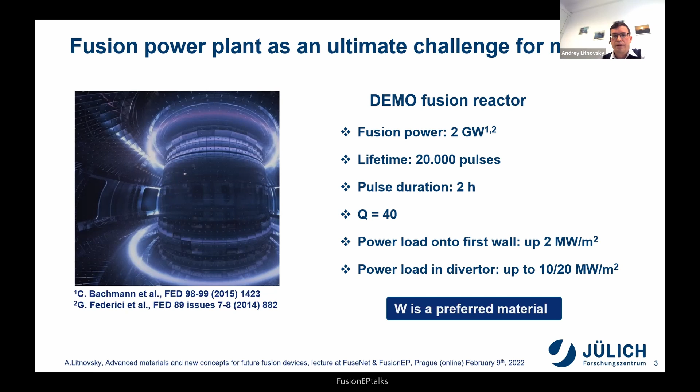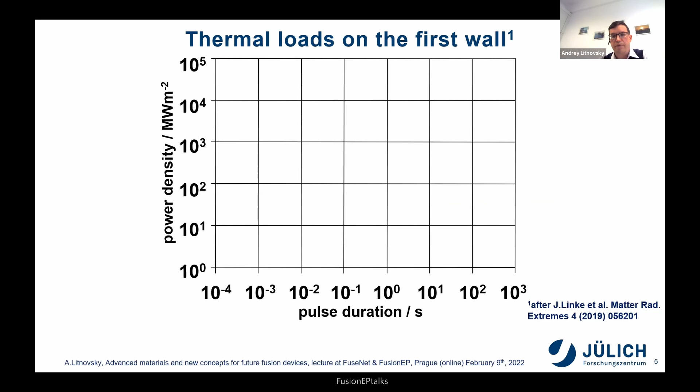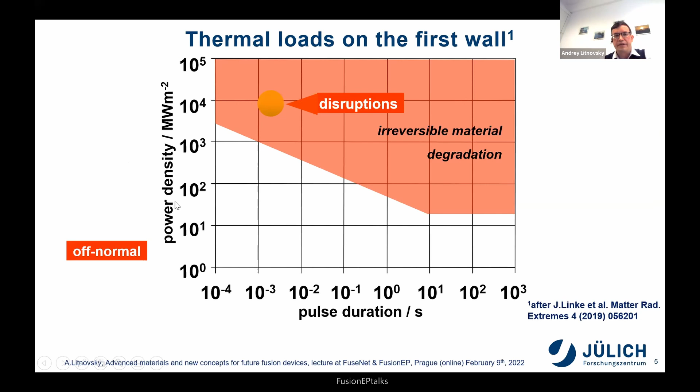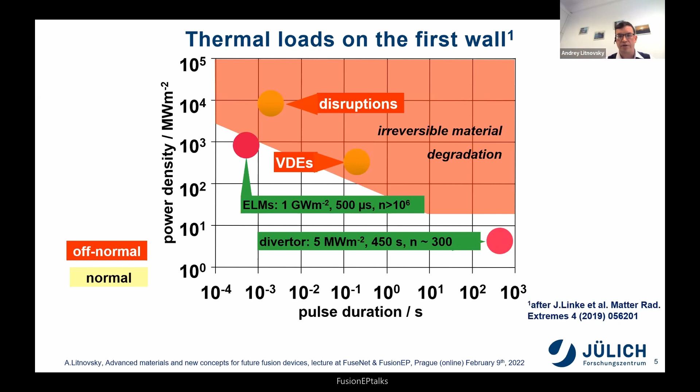If we look to the conditions awaiting our materials in the fusion plasma, we can see this area of irreversible material degradation. This is where we really lose the material - this is the power density, and this is the duration of the pulse. So we can tolerate disruptions and vertical displacement events for a very short time only. But even if we look at the long pulse duration, remembering we will have pulses of 2 hours in the power plant, we can see already that the tolerable loads, the power densities, become really quite small for the material to withstand. So time plays against the material lifetime, meaning that in the fusion power plant, in the reactor, already regular operation becomes challenging.

From current tokamaks, and I actually work in almost all the largest tokamaks, we see the performance challenges facing our materials. This can be dust from materials, plasma disruptions, melting of components, or cracking of the materials, which was observed on several devices, shown here and a couple more.

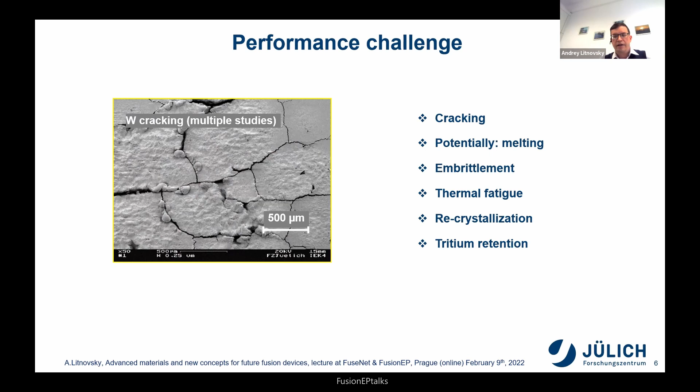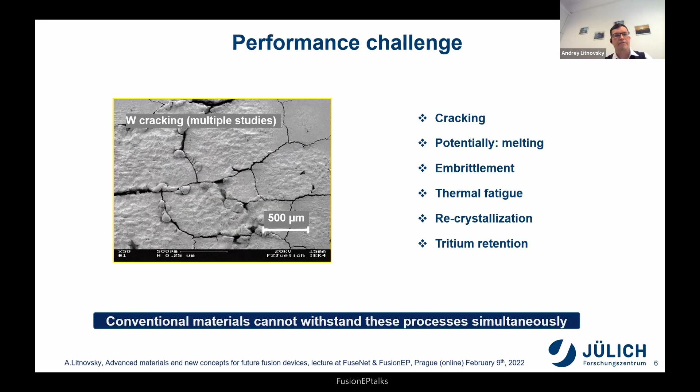But the key difference from current reactors, and even from ITER with its 10-minute pulses, for a power station or power station-like reactor, during discharge almost all of these processes will be changing the material simultaneously. They will happen simultaneously. And presently, there are no materials which can withstand these things simultaneously.

Another characteristic feature of the fusion power plant, which distinguishes it from current fusion devices, is the neutron environment. As we remember, in the nuclear fusion reaction, heavy isotopes of hydrogen, deuterium and tritium, merge to create helium ash, the fusion ash, plus a high energy neutron. So we can see that the materials under this massive neutron impact will transmute, and after 5 years of operation, already 6% of tungsten will transmute to these isotopes.

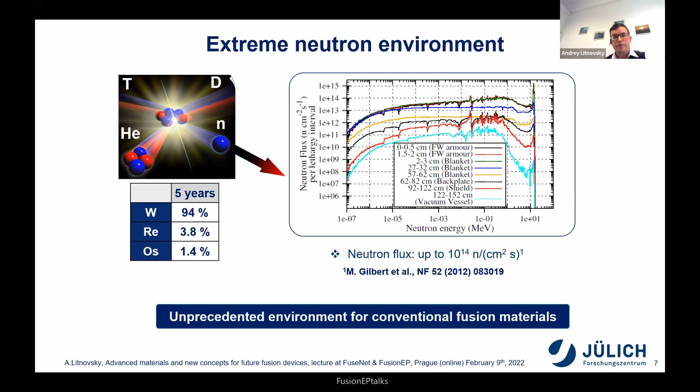Speaking about the neutron flux, here we see the neutron flux density as a function of energy per lethargy interval. For 14 MeV neutrons, the fluxes can be as high as 10 to the 14th neutrons per square centimeter, which is really a great number. This is a really challenging environment which will change the properties - I would say honestly change, because they may influence the material this way or the other. And this is only speaking about the so-called regular operation.

There is also a safety challenge, and of course in the case of a power plant, safety will play a very important role, and it will actually be by far more excessive than the safety requirements for, for instance, ITER. The temporal license of ITER actually took something like 50 meetings to handle and around 1,400 documents. So you can imagine for the first licensing of a power station what we can face.

Under these circumstances, the fusion power plant will face tremendous challenges and additional circumstances which will further complicate operation. First, there's no immediate access to water and coolant, no electricity, difficult logistics, and lack of manpower, which may make it difficult to suppress the release of radioactive materials and dust from the vacuum vessel. So this should, in fact, be avoided.

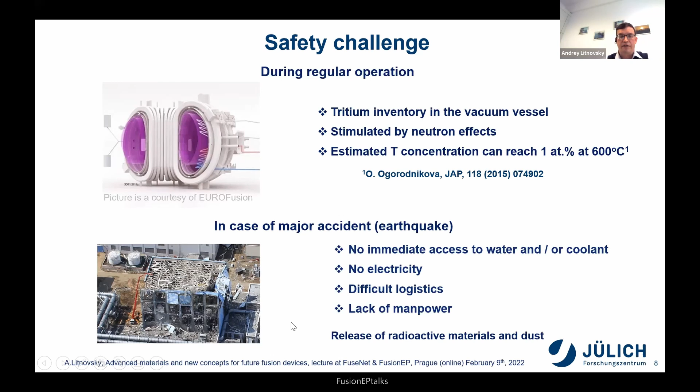So in this case, the new plasma-facing material - and this is the topic of this lecture - to show this concept, it will be the combination of performance, safety, and technology united in each of these materials. In the course of this lecture, I will go from topic to topic to show solutions for this challenge, starting from performance.

Looking at performance, one of the perfect examples is so-called tungsten-fiber-reinforced tungsten. It's similar to carbon fibers - we are introducing small fiber-like wires into the tungsten matrix. The idea is to make the energy dissipate. The energy which would rather go to crack formation and destruction of the material will be dissipated by pulling out of the fiber, plastic deformation, bridging the crack, or deflection of the crack.

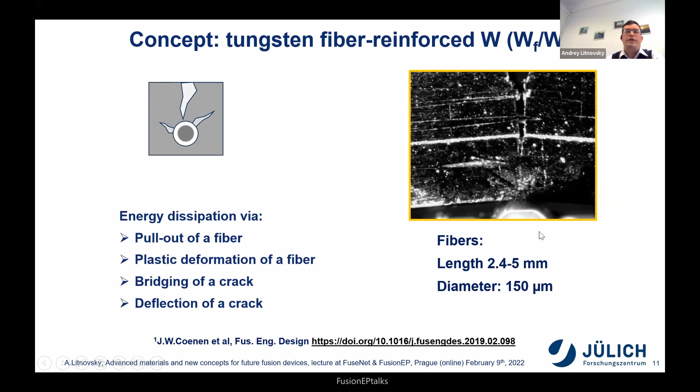Here are the dimensions of the fibers, which are quite small. This movie shows how it all works. You see the crack goes, and then it enters the first fiber. It really branches, so the material continues to struggle against this. This is a second crack, which still takes time to break this fiber.

To see with numbers, if you apply force and look at displacement, pure tungsten is shown here. With applied force it simply breaks - there is no displacement, it basically gives up. Whereas even for the first non-optimized design, after the initial crack you can still tease the material, so it can still expand and go further.

So it still fights against this. And also you can see already the difference in the maximum force which is applied in order to get this crack at all in this material. Whereas with optimized tungsten-fiber-reinforced materials, you can see that the maximum force applied is already double as much. And you can see here before the first big crack formation, the material is actually still expanding and going step by step, not going really to zero power, which really shows the perfect pseudo-ductile behavior. We see that this material really overcomes the intrinsic brittleness of tungsten.

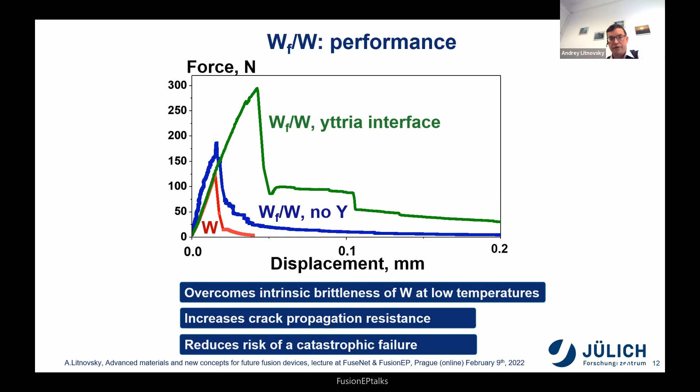At low temperature, there will be another example of how you may do this, but let's look to another concept for the divertor, for this 10 to 20 megawatt. It is similar in the sense that we are using mostly the same fibers, not in the matrix, but put as a material. It is so-called microstructured tungsten.

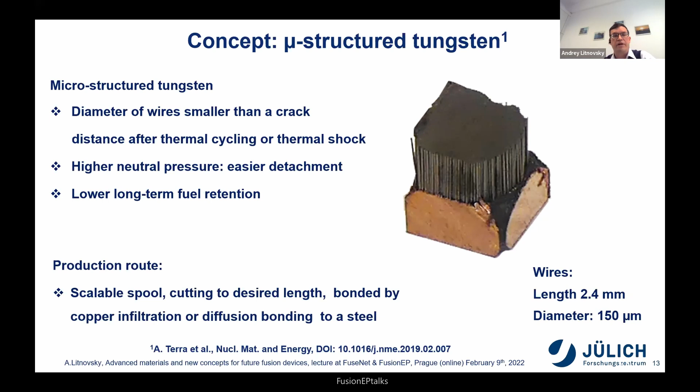So there are a series of devices with the same dimensions of 0.15 millimeter diameter, cast molded on the copper via infiltration or diffusion bonding on the steel. The essential advantage of such a system is the diameter of wires is smaller than the crack distance after the thermal cycling or thermal shock. So it basically will isolate damage within this small diameter, within the small fiber. It may provide high neutral pressure because plasma attaches on the larger surface, and may then provide a lower long-term retention. But let's see how it all works.

To study this, there were several laser pulses with the power density of 0.64 gigawatt per square meter, simulating transient effects. In total, it was 200,000 pulses of 1 millisecond put to the ITER grade tungsten, made with ITER specifications, and on the microstructured tungsten. To be honest, the ITER grade tungsten showed damage after several hundreds of these pulses already, whereas the microstructured tungsten survived all these 200,000 pulses. This is an incredible number.

Without detectable damage. To be honest, also the deuterium retention was larger, which is not good for such a structure, but the operating temperature of such materials will be high enough to outgas this deuterium. So this actually showed the incredible performance under repetitive high power loads.

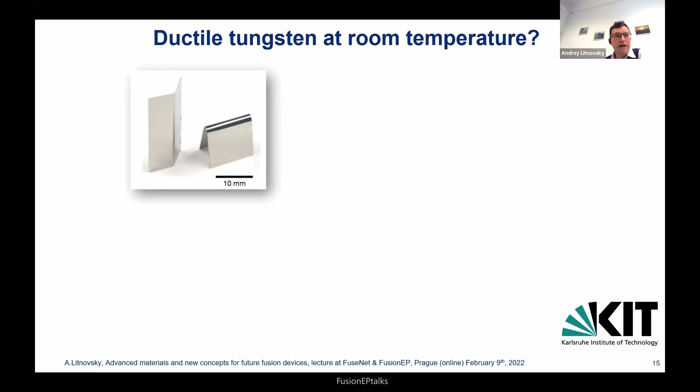Speaking about the pseudo-ductility, what about different technology? This was actually brought by our colleagues at Karlsruhe, who noticed at first glance a very simple example. If you have tungsten foil which is thin enough, and you know tungsten as such is a tremendously brittle material, you can really put this on the floor and it will crack or break apart. But if you take this foil, which is cold worked and rolled, and you see the grains are highly inhomogeneous, you can actually bend this roll and nothing will happen.

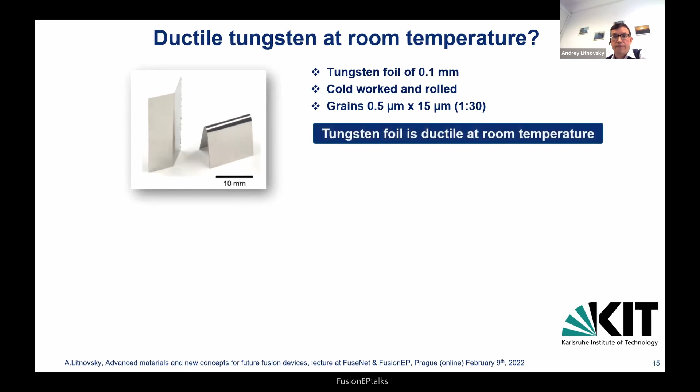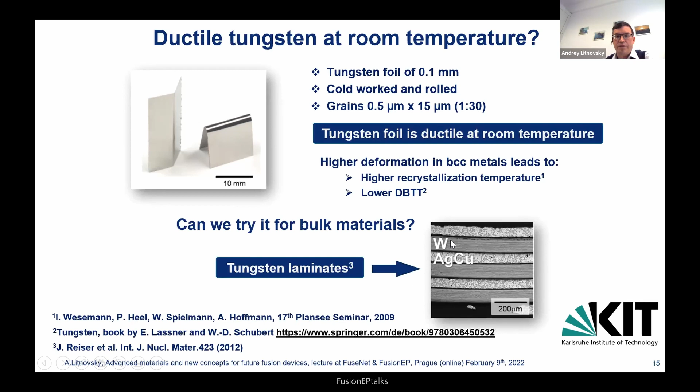So it is ductile even at room temperature. So the idea was, why don't we use such a design in order to get the components of the bulk material? This came to the idea of so-called tungsten laminates, shown here as an example, a layered tungsten and, in this case, the silver-copper eutectic system.

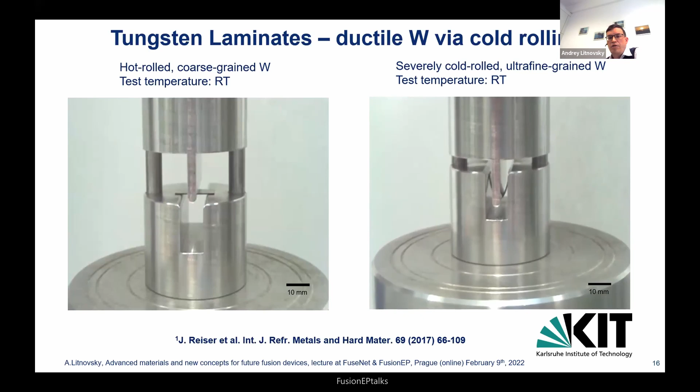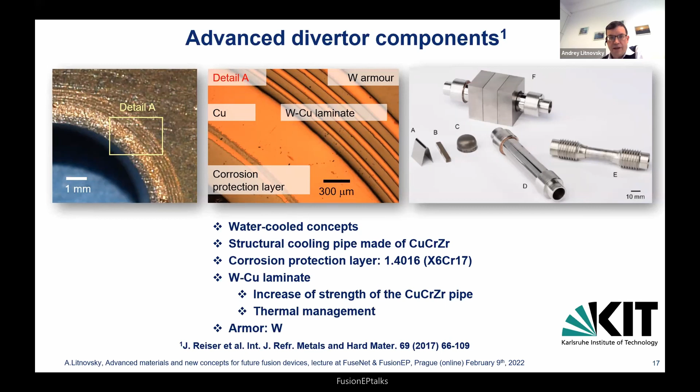Going to the safety of this, there is another suite which helps with the conventional materials in the advanced concepts. Starting again from the regular operation, we will have a tritium permeation problem. The tritium from plasma can enter the components of the material, and this will be half of the problem if it remains in the components.

But if it goes into the cooling water, it will create tritiated water. This will be radioactive water, which is virtually incapable to catch. So we need to contain tritium within the plasma-facing components. How can it be done? With the means of so-called tritium permeation barriers.

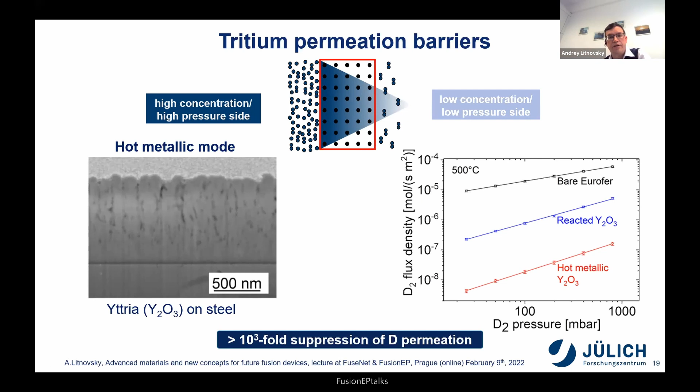Only one comes through. But the permeation barriers, even the non-optimized ones, increase this by at least 10 to 100-fold, whereas the optimized barrier can make more than a 1,000-fold increase in the efficiency of tritium capturing in the plasma components. And this is during regular plasma operation.

If we speak about a catastrophic accident, there is another concept that comes into play, called the SMART concept, which stands for self-passivating metal alloys with reduced thermal oxidation. Why do we speak about thermal oxidation?

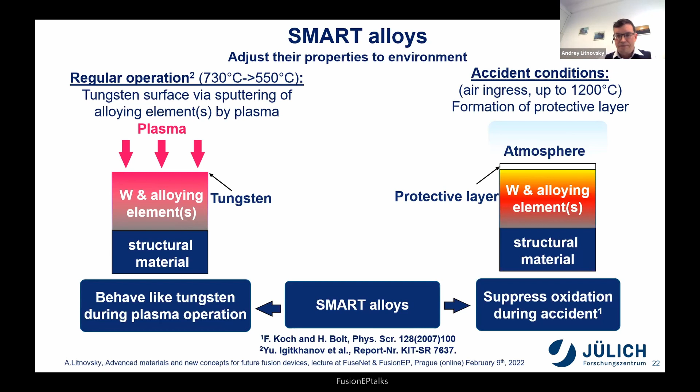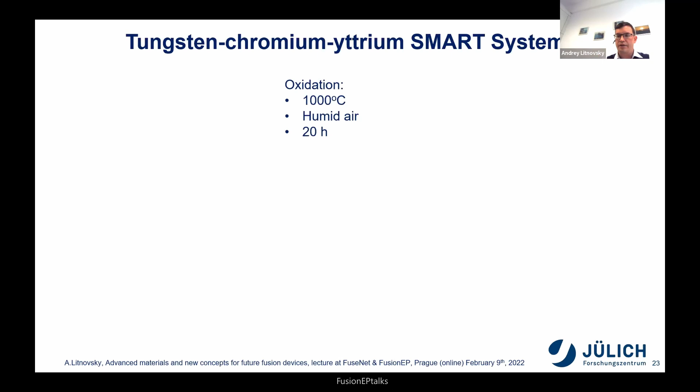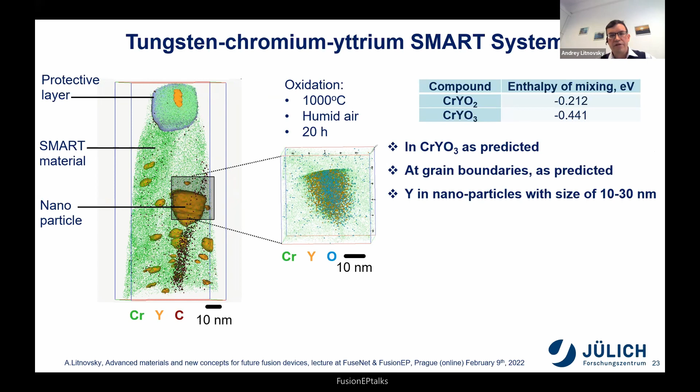So the yttrium was found experimentally in this particular stoichiometry, exactly as predicted by the modeling, at grain boundaries as predicted by the modeling, and in very tiny particles. What else does the yttrium do? Yttrium, as we see, bonds oxygen.

So the chromium can move further without any obstacles to form this protecting layer, protecting tungsten from oxidation and sublimation. So basically it stimulates the chromium transport. The effect of yttrium is fantastic in these conditions. And as you see, this is a highly nano material.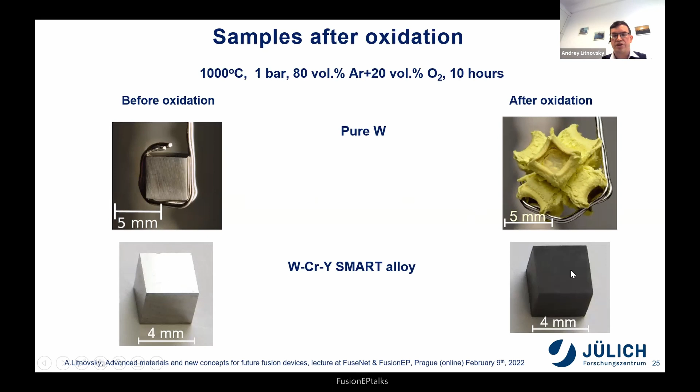What will happen with the smart alloy, initially so shiny? It will just become black. But it completely preserves its shape, and if you scratch it a little bit, it will be shiny because there are only a couple of micrometers of this protecting layer. So nothing really happens to it.

So they indeed feature quite impressive resistance to oxidation. Of course, since these are plasma-facing materials, it is very important to see how good or bad they are in the plasma. For this, we made dozens of experiments in several facilities to see the effect.

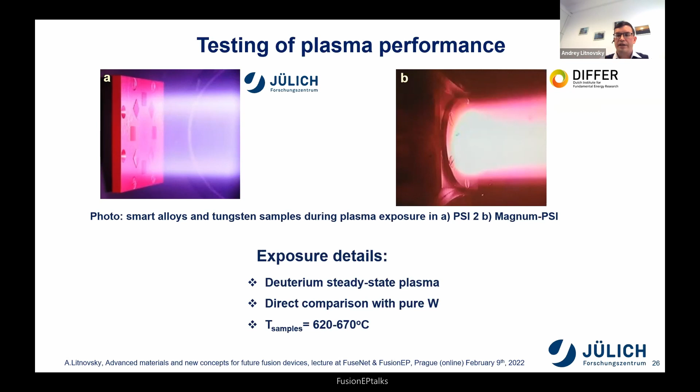The materials were either simultaneously exposed with tungsten, or consecutive identical exposures were made, where the smart alloys and pure tungsten samples were subject to deuterium steady-state plasma, like in a power station, at a temperature like in the power station's first wall. We had the chance to compare the results with a baseline material, pure tungsten, and this is what you can see.

First, surface recession - how much material was sputtered, tungsten versus smart alloy. You see the numbers are the same. So basically, after this protecting layer on tungsten was formed, the materials are sputtering in nearly the same way.

If we look at the mass loss due to sputtering as a function of fluence, calculated for demo operation—these fluences correspond to 20 days of continuous operation of the power station—we see smart alloy in green and tungsten in gray.

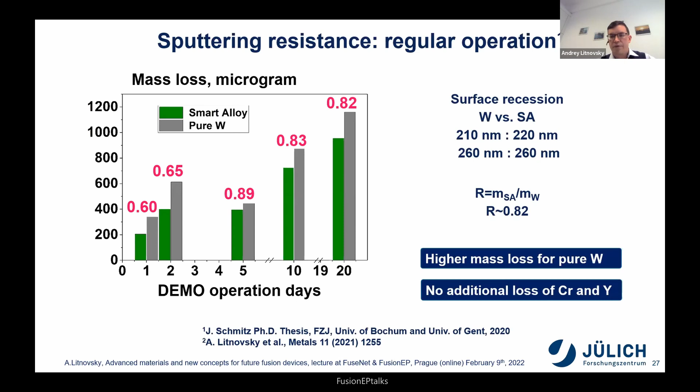Finally, the ultimate test: after regular operation, suppose an accident happens. Does the smart alloy, once exposed to plasma, still have enough material to suppress oxidation? The ultimate test was oxidation resistance after plasma exposure, to get the full picture.

This graph shows the gradient of mass change during oxidation. We were first alarmed because the initial ideal samples—the cubic bricks I showed—had only a tiny change in mass due to oxidation, whereas the plasma-exposed samples showed a much larger change. So we started investigating why.

It turned out the issue was not the material itself, but its shape. Look at the shape of the plasma material sample—it has a hole, a loop, and these black parts which we cannot clean. These exact parts, even without any plasma exposure, show the same trend of mass change. The plasma-exposed samples, shown in reddish color, actually perform even better—the smaller the difference, the better.

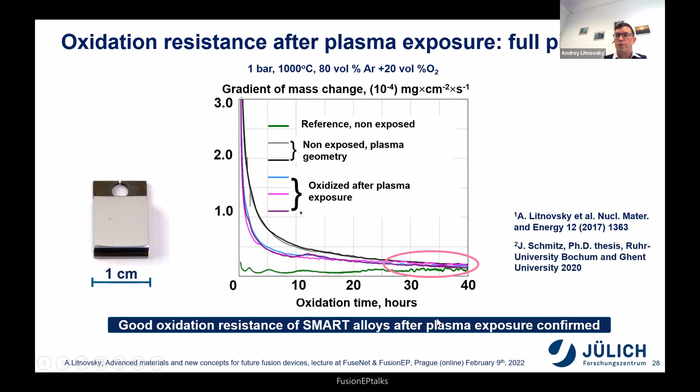But the important message is that after 30 hours of operation, this geometry effect vanishes and only the material matters. The shape effect governing the mass change is simply dirt burning out during manufacturing of these samples. The material itself works well irrespective of plasma prehistory. This was a very important result.

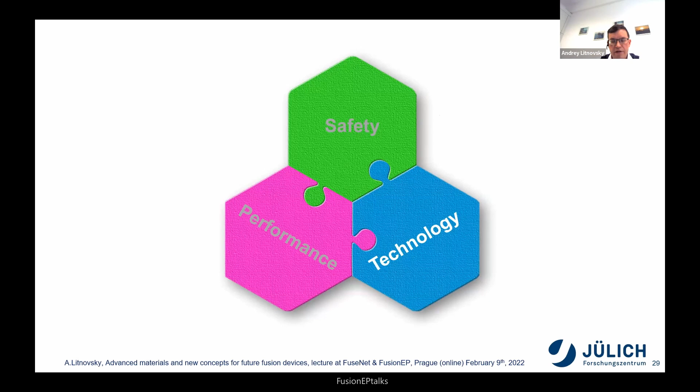Now, going to the technology of producing this material—it's not just something wonderful at the nanometer scale, but how do we actually cover a power plant with this fancy material? We use very sophisticated technology, and a couple of examples are shown here.

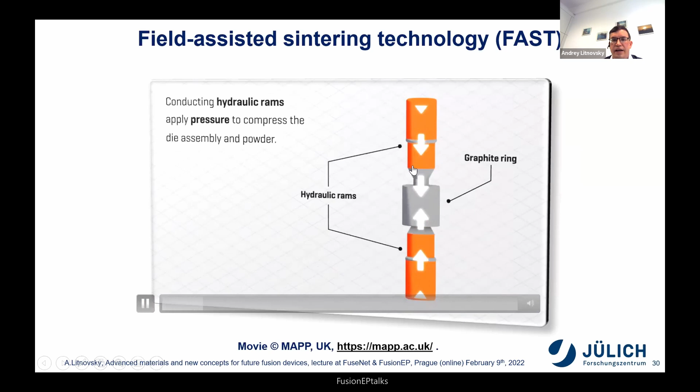One of these is the so-called field-assisted sintering technology. You'll see a short movie, and I'll describe a few details of what's going on. In conventional sintering, you simply press and heat, and this takes hours. With field-assisted sintering, there's one additional effect: you press the powder inside, nicely isolated, and start pressing—this part is like usual technology.

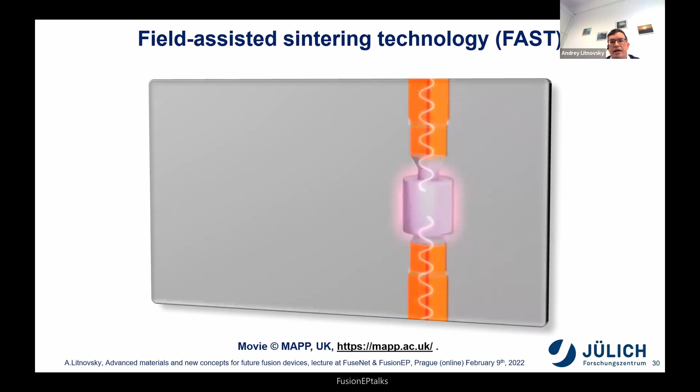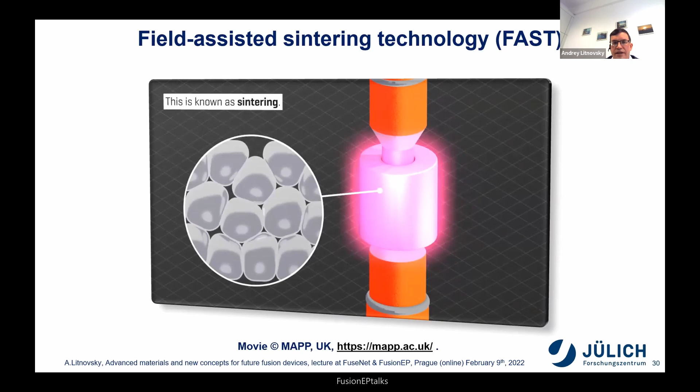Now comes the game changer: in field-assisted sintering, you push a pulsed current through the particles. This allows us to heat the powder very efficiently and to melt, or at least deform, the boundaries of the powder particles, resulting in spectacular features.

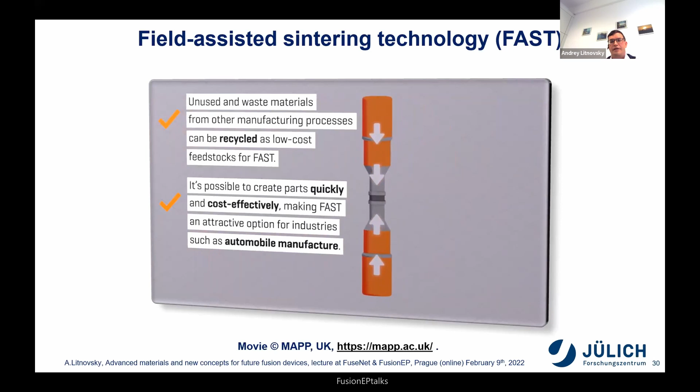This makes it possible to produce materials with very different properties within one sintering technique. As you see in these results, the most striking effect is the low cost and tremendous speed of this sintering. Our smart alloy can be sintered in an entire process of 15 minutes—the sintering itself takes only 7.5 minutes, and another 7 or 8 minutes are for cooling.

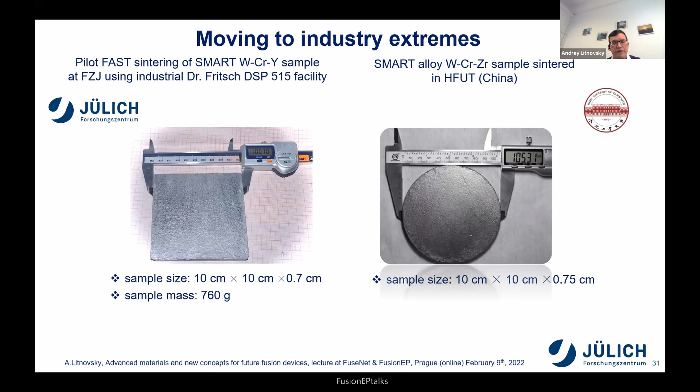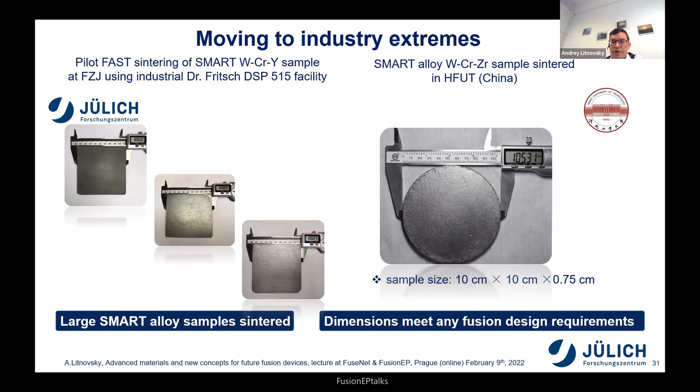Speaking of these new materials, they are already available at macroscopic scale, both in Germany and with our Chinese partners. If you look at a segment of the ITER first wall, which is 5 by 5 centimeters, we have made ones here at 10 by 10. This already exceeds the fusion requirements, and we've made quite a lot of them in the last year. This is not a problem, and it was done using an industrial machine.

Another technique used for advanced materials is additive manufacturing. You'll see a short movie of this additive manufacturing process.

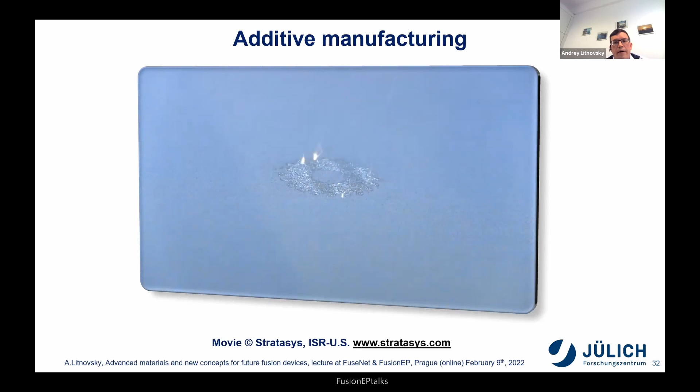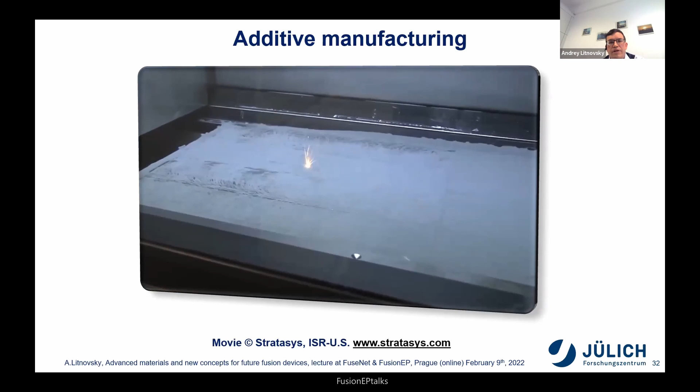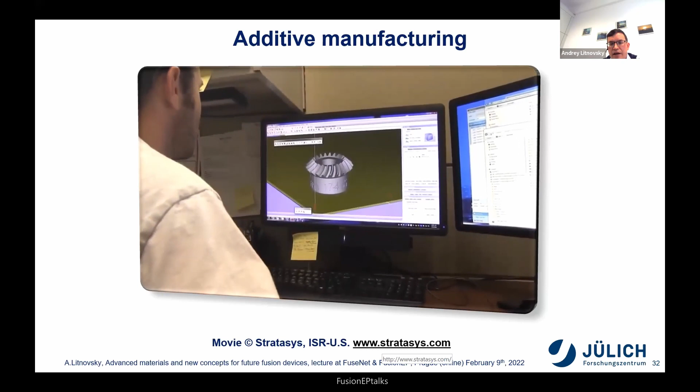We use the energy of the laser or electron beam, which is sintering the powder. So you basically see the powder bed in which this laser is focused, and you see how precisely it can actually melt the powder particles, which allows the creation of shapes you would never be able to sinter with a single process.

It is fully computerized and it works nicely. It actually reads the CATIA design, slices it, and transfers these slices of material to this additive manufacturing device.

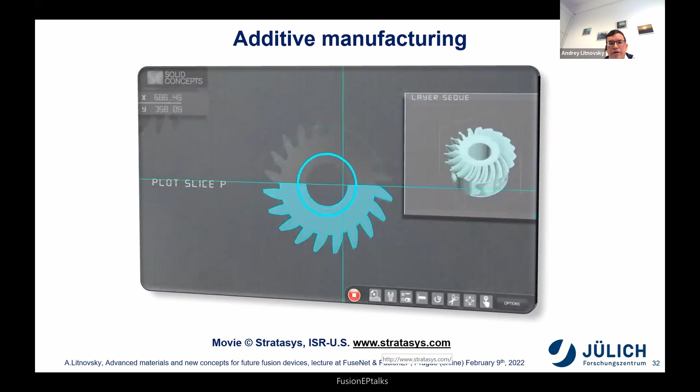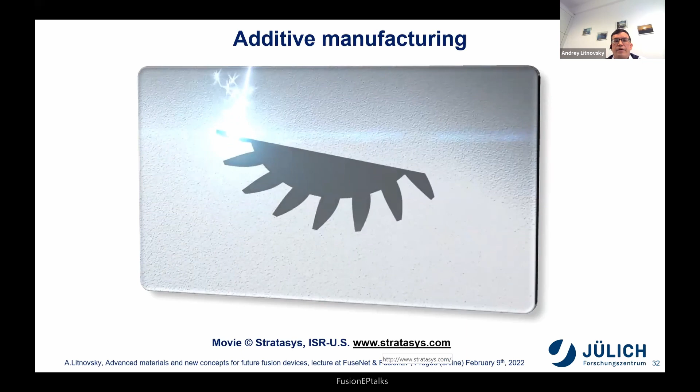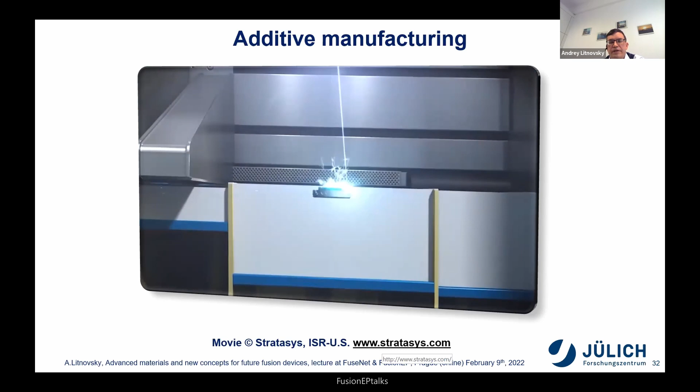Here is a view of the material: below it is the powder, and on top is a laser system. It melts and shoots the powder, consolidating these particles. At the end of this process, one layer is selected, then the powder is filled in and the next layer is produced, and so on, until the entire detail is made by this technology.

As soon as this part is made, you simply need to remove the residual powder, which can afterwards be recovered, and here you have the results.

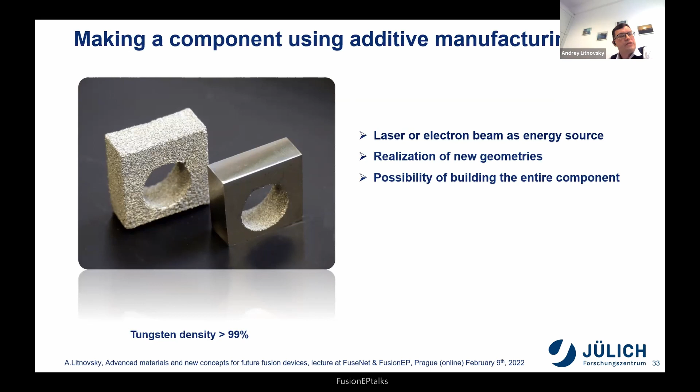This is actually the front end of manufacturing techniques, and it's now widely used in creating first wall components, like you see here, the tungsten blocks. The tungsten density made by additive manufacturing, in this project supported by Eurofusion, can be as high as 99%. But this is not the end.

If we see that our plasma-facing material needs to be joined to the structural material, steel, we find that a number of parameters are very different between tungsten and steel. Thermal elongation is three times less for tungsten, heat conductivity is three times more for tungsten. It's like a magic number, three times, but every time in a different direction.

So the idea is, as you've seen, you're adding the powder, but you can also change the powder. You can mix the powder and make so-called functionally graded materials, gradually going from tungsten to steel, or from steel to tungsten. Here is the example.

Here is the steel matrix, and here are already some tungsten particles made by this additive manufacturing. Density is already quite high, but there are still pores and intermetallics—still, this is the way to go.

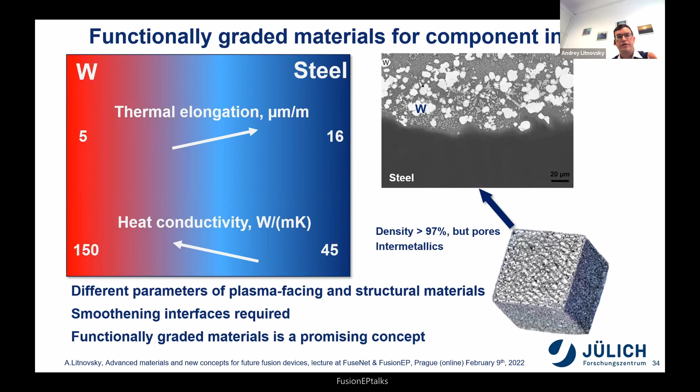So this is how fusion takes on modern technologies in trying to get the component. Speaking about the component, how can it look? We don't know, but I think it will be a combination of all these techniques.

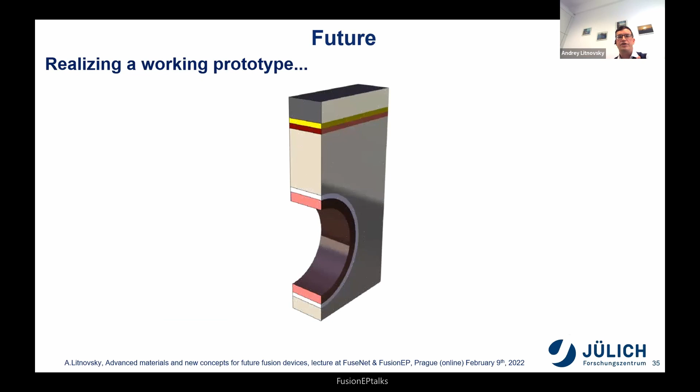Most probably this component will unite the present concepts. This will end my lecture, and I hope I was able to convince you that we will have extreme conditions in a fusion power plant, which will require new advanced materials with unique characteristics.

Plasma-facing materials must combine performance and safety, and provide robust interfaces to the structural materials, and need to be technologically manufacturable. We've seen that tungsten-fiber-reinforced tungsten microstructure could be used in the divertor, while tungsten alloys are suggested for the first wall. Laminates can be used for heat sink materials, and for safety, permeation barriers can be used during regular operation, whereas smart alloys can show their features during an accident.

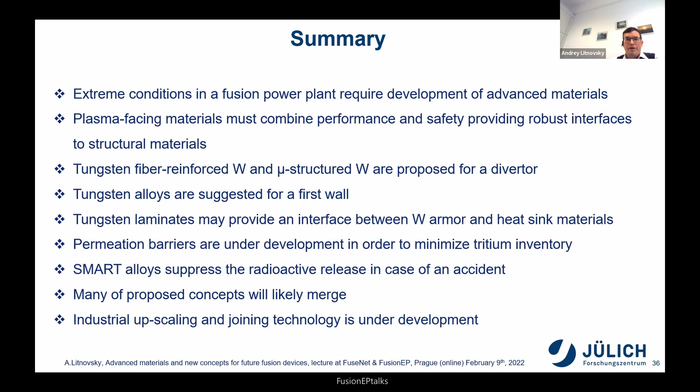With this, I'm finalizing here. If you want to learn more, and get a glimpse of the place of these materials, I can advise you to have a look at our new chapter on fusion reactor materials.

You can get this access either via Elsevier, or you can send me an email, and I can send you the copy. This is part of the huge Encyclopedia of Nuclear Energy, one volume of which is devoted to nuclear fusion. In total, I think there are 12 volumes. You are very welcome to read all of them.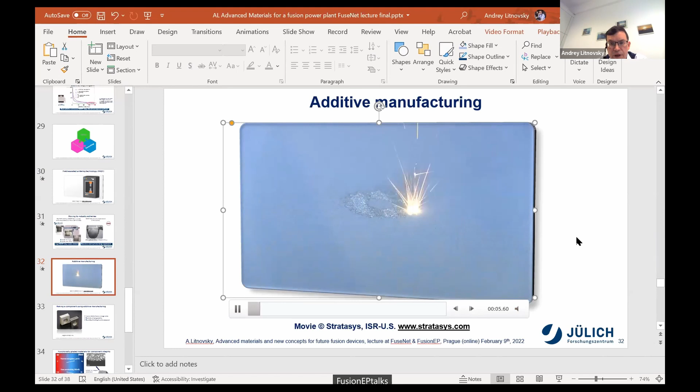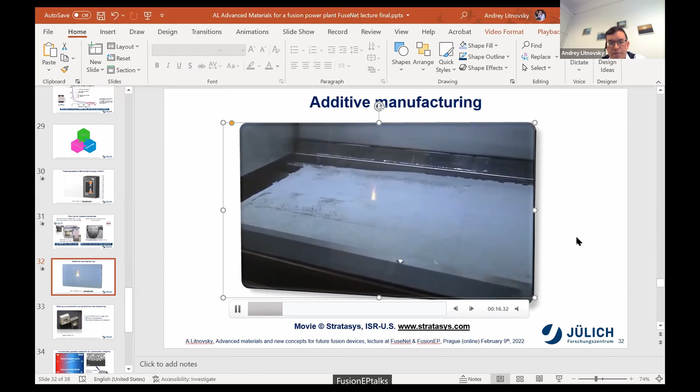If we are dealing with refractories, first it is a very high melting point, and also heavy powders with quite specific chemistry involved. But the melting point is the largest caveat.

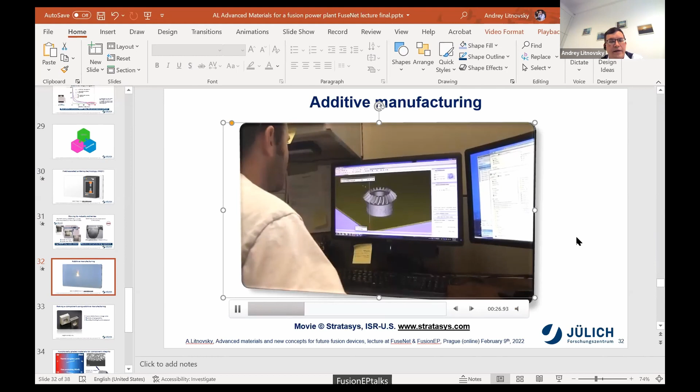You need 3,500 degrees C to melt tungsten, which is not a piece of cake. At the moment there are pilot studies, and as you see, the initial element here is quite rough.

But if we go to the machining step, which you need anyway, you can achieve the tolerances which are a function of the machine itself. It's not the manufacturing technique.

For instance, the Jülich device can already achieve tolerances below 1 micrometer, and this is an industrial device. If you look at the tolerances for the ITER divertor, they are in the range of millimeters for such elements, for the entire row for instance.

So the most important thing here, I think, is not even the tolerances but the density. If we can create dense material in this form, we can start machining the surfaces. It will be more difficult for complicated shapes which you cannot machine afterward. But at the moment we are not that far away.

The question is whether we can make the entire element, like a pipe or whatsoever, by introducing different kinds of powders. This would be really interesting.

Thank you, I guess that perfectly answered it. I can see in the chat that Jose was satisfied with the answer, so thank you very much. Yes, sorry, please Vadim go ahead. Yeah, thank you, thank you. First of all, very nice presentation, it was very interesting, I appreciate it.

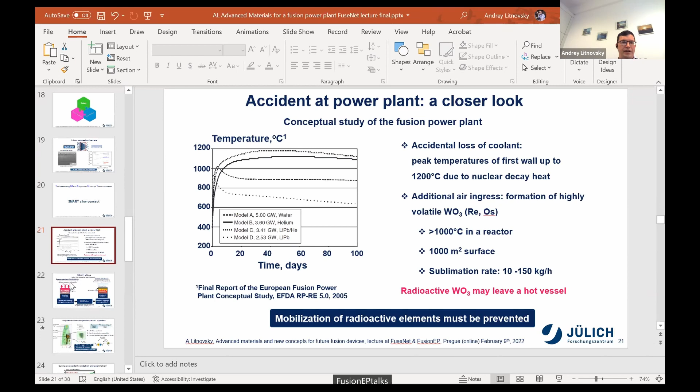The second question, on tungsten-fiber-reinforced techniques — there are several techniques, and there are still competitive approaches to producing this. I'm actually very impressed by how these guys did these things. First, it's a kind of process where you simply put all these fibers in the matrix and sinter.

Initially, one needs to deposit an interlayer as a barrier, because you need a weak interface between the matrix and the wire, done for instance in a magnetron device. So all these wires are first coated with that layer, then put into the sintering device and sintered as a whole.

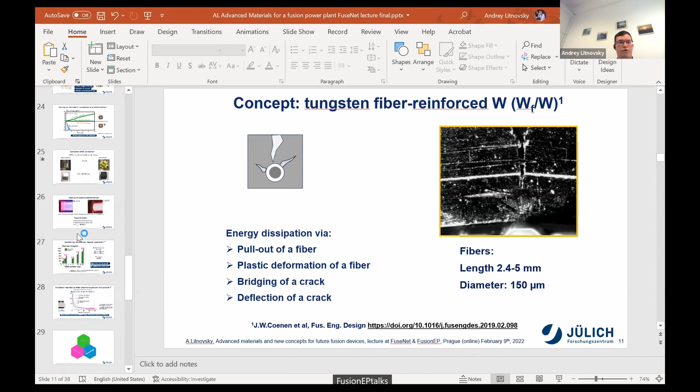This is done in a facility such as the one you might see here — you can simply add these fibers inside. This is one of the most promising techniques.

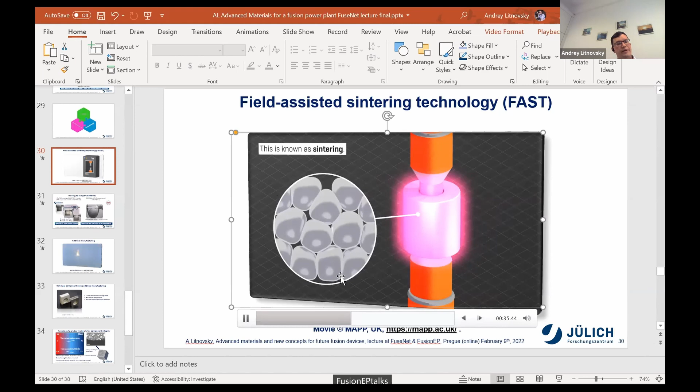Apart from this, there is chemical vapor deposition, where the matrix essentially emerges around a skeleton of fibers, reacting with tungsten hexafluoride gas — the fluorine escapes and tungsten remains.

With this method they can make really big samples with quite good density, but the process is rather toxic, as you know, due to evacuating the fluorine.

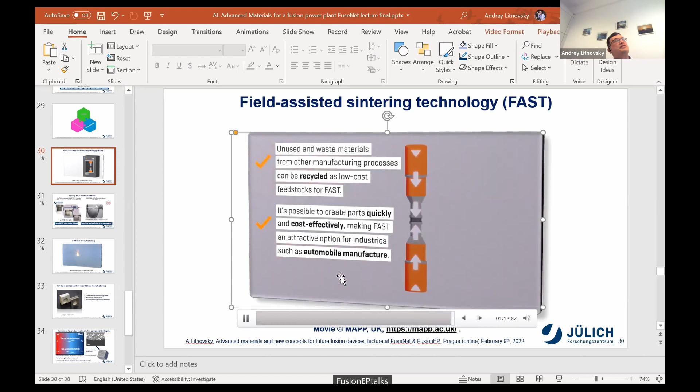But what they're really doing now, since last year — I was really impressed by this — they figured out a technique using yarns. So basically this is not a single wire; they're collaborating with a Textile Institute.

They're bending 3, 4, or 5 wires into one bundle, and instead of single wires there are bundles inside the matrix. So the effect of these combined fibers is that they become virtually unbreakable — you really need a lot of force to break this bundle.

You can imagine if you bundle all these fibers. These are now presently produced with chemical vapor deposition, but I don't see the crucial problems of making them using FAST technology.

What we're now discussing, since both smart materials are going to industry and available in kilograms, we did make one attempt. It was not successful to make the tungsten smart alloy matrix with tungsten fibers inside. It might work, but it is not good for oxidation. Since we now have kilograms, we may have a chance of making the smart fibers out, and this can be an interesting combined material.

Thanks, I hope I answered. Yeah, thank you. And your assumption for mass production, in order to cover all this chamber, what power facility should be, for example, I don't know.

So you see, these are three samples, each of which 10 by 10 centimeters. So if we cut this, we will get four quadrants, let's say, like for ITER.

It is an industrial facility. The entire duration with the cooling was, if I remember correctly, 20 minutes with cooling, full automatic process at the end. So you're basically pouring this die with the powder, and then you're getting the sample which can be ground.

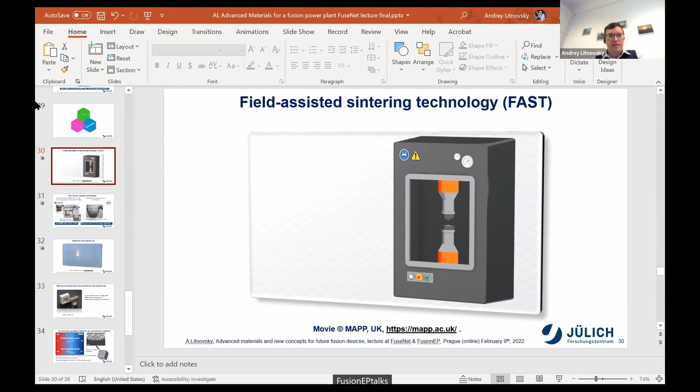And the materials, the point is also here that this fast technology is not very young, I would say. It's something like several dozens of years already, but now it's really going to the industrial scale, and there are more and more on the market. So the price of this device, which has a total power of 150 kilowatts, I think, it's not the end of the world, so to say, the prices also become tolerable. And in fact, those devices on which these samples were sintered are industrial devices already from Dr. Fritsch.

Okay, thank you very much. And may I ask another question?

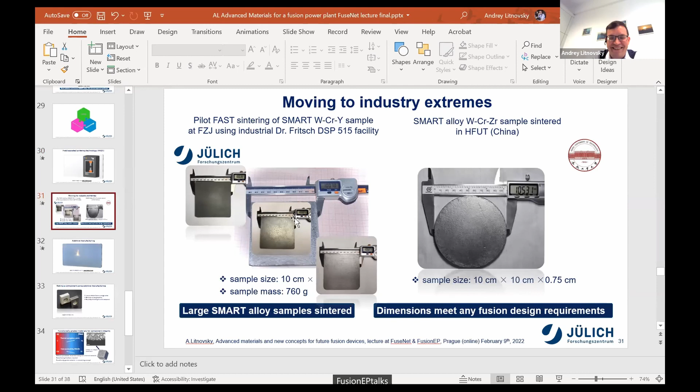Yes, it's very fast, but just interesting, because regarding the multi-layer composite, silver is used, and if I'm not mistaken, it's an irradiated material under neutron flux impact. However, according to safety regulations used, for example, in ITER, materials should be chosen following the ALARA principle. Did you do any analysis of the impact on material radioactive decay, for example?

Yes, the answer will be, you're absolutely right, the silver is not allowed for fusion purposes. This was the first trial and error method, which our colleagues used to see if this concept works at all, to see if there are no weak spots and so on. If you go here, there is no silver anymore.

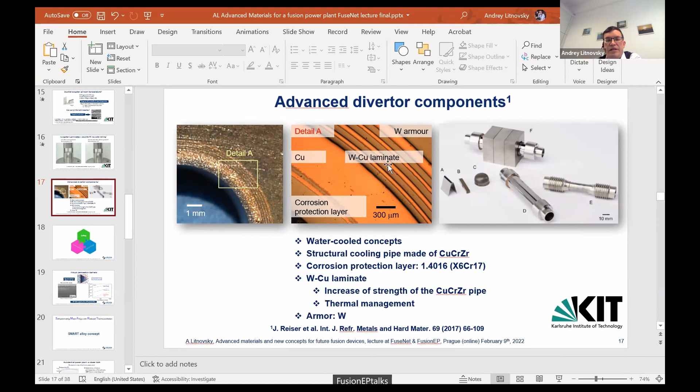So this is basically like a layered, functionally graded material. We can play with the thickness a little bit, we can play with the amount of the layers in order to accommodate different coefficients. But the silver was used only for the first time to see if the technology works, if we can at all make such laminates. It is, strictly speaking, not fusion relevant.

Thank you very much, it's very interesting. Last question: so yttrium, when you add yttrium to alloys, it may make materials magnetic. Is the alloy magnetic or not? It's a simple question, thank you.

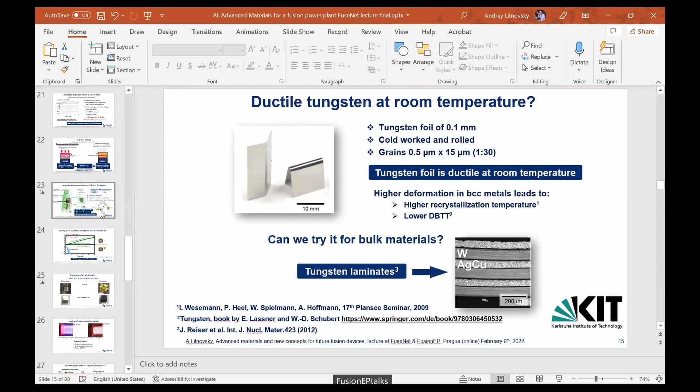It will not make the alloy magnetic because we have 0.6% of yttrium. This is actually the kick effect here, I mean here we can see it's quite a lot, but in total it is 1 atomic percent. So it's really a very tiny amount, located in very precise locations, and not fully explored until now, doing interesting jobs in many areas.

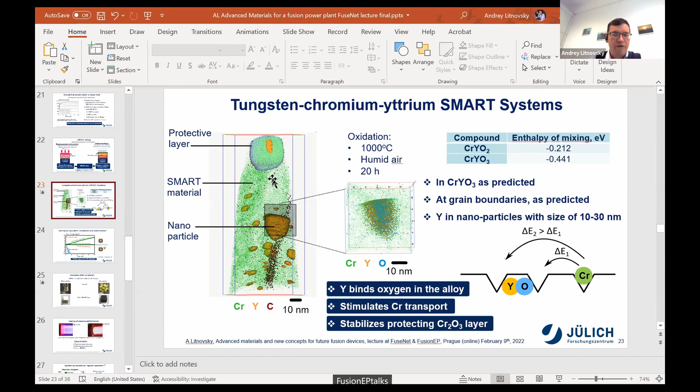If we had another hour for our investigation, I could show you the protective layer, which is what we're now investigating with the Oxford colleagues and Warsaw colleagues, how this yttrium at all does this in the protective layer, because here you see nanoparticles. In the protective layer, it is pure chromium oxide, which is framed by yttrium. It's really like a holding, like gluing this chromium in between, and this is only something like 5 to 10 nanometers thick. There is nowhere any yttrium itself, but it is a continuous layer. What it does, what its function is, we don't know. It is terribly stable and really very dense. Thank you very much. Thank you.